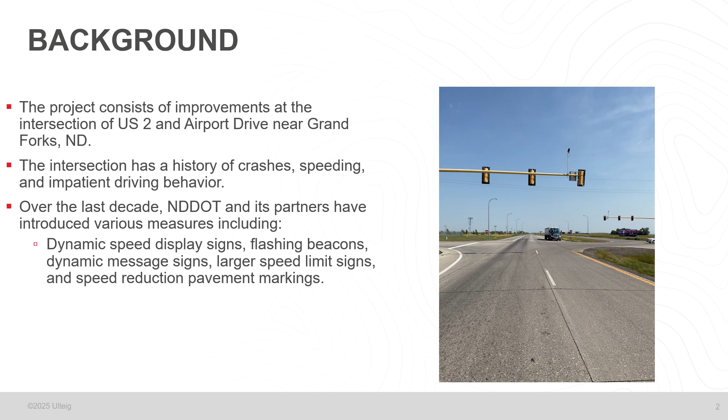This project is located at the intersection of US 2 and Airport Drive, which has experienced instances of impatient driver behavior, speeding, and a history of crashes. The North Dakota Department of Transportation and its partners have implemented several measures to slow drivers and improve awareness of the intersection. Things like dynamic speed display signs, flashing beacons, dynamic message signs, speed reduction pavement markings, and larger speed limit signs.

This intersection has been studied a number of times, and each effort has added valuable insight. Early work included the 2014 Local Road Safety Plan and the US Highway 2 Access Study. A road safety review followed in 2017, and more detailed traffic operations studies were completed in 2019 and 2024. These studies tell us what kind of improvements might help and how different designs could affect travel and reduce crash potential and severity. All that background gives the current project a strong foundation to build upon.

Now that we've talked about the information gathered from previous studies, let's look at the factors that define the range of alternatives at this intersection. Every project has its boundaries, and for this one, several key constraints help shape the range of alternatives we can consider. One of the most significant is the Grand Forks International Airport's runway protection zone, which extends towards the project area. These zones are regulated by the Federal Aviation Administration to ensure safe aircraft operations and limit the height or placement of certain infrastructure.

In addition, the area includes existing utilities, a water booster station that supports both the Grand Forks Airport and Grand Forks Air Force Base, access roads, business entrances, and the English Coulee watershed drainage ditch, all of which need to be considered during design and construction. Together, these factors establish the physical and operational boundaries for where intersection improvements could realistically fit within the surrounding area.

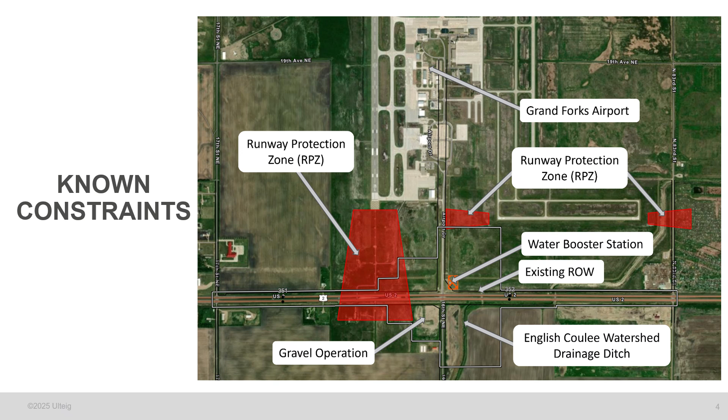Here you can see the project area. It's been drawn based on a combination of possible design alternatives and the known constraints in the area. The study area also accounts for known constraints such as the runway protection zones, utilities, nearby roads, property access, and environmental factors that could influence the design, such as wetlands, cultural sites, and species habitats. As the project moves forward, the information gathered from studies, fieldwork, and your comments will help narrow down which alternative best meets the project's needs.

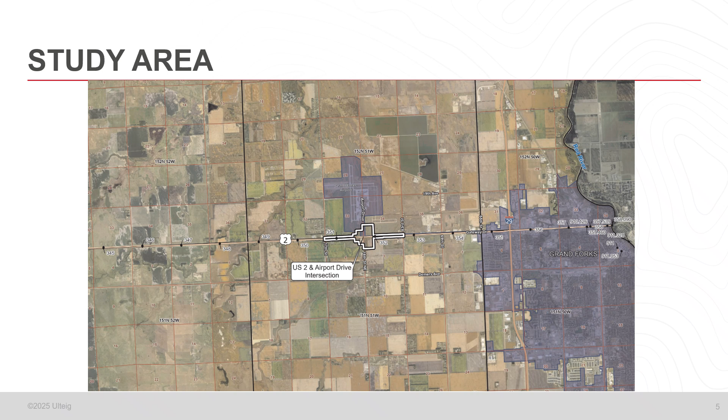Public feedback is a big part of this process, and one of the ways we've been gathering it is through Ulteig's Pinpoint app. Pinpoint is an interactive online map where users can drop pins and leave comments about specific locations. Some examples could include a spot where turning feels difficult, or traffic tends to back up, or visibility could be better. The project team has already used Pinpoint during our stakeholder meetings, collecting comments from local partners like the Airport Authority and city staff. Those insights helped us narrow down the initial range of design alternatives and focus on the options that best address the project needs.

Now we're opening Pinpoint to the public, so you can add your feedback too. Just scan the QR code on this slide or visit the link to share your thoughts directly on the map.

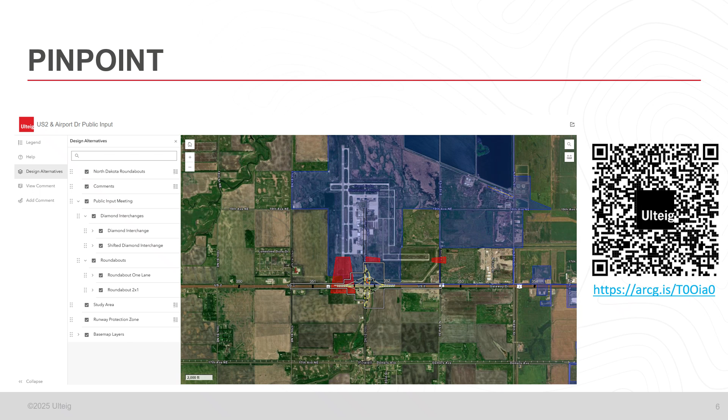Here's a quick look at where we are in the project schedule. Phase 1 scoping has been completed, covering the initial data collection and early coordination. We're now in Phase 2, which focuses on the environmental document, preliminary design, and continued stakeholder engagement. This phase will run through spring 2026, and it's where we'll evaluate design alternatives and identify a preferred solution. After that, Phase 3 will move into final design, right-of-way, and permitting once the preferred alternative and funding plan is confirmed. Public input is a valuable asset and will remain a key part of every decision as the project advances.

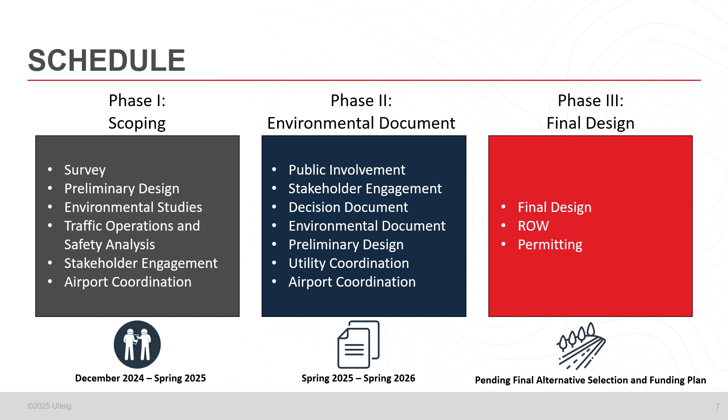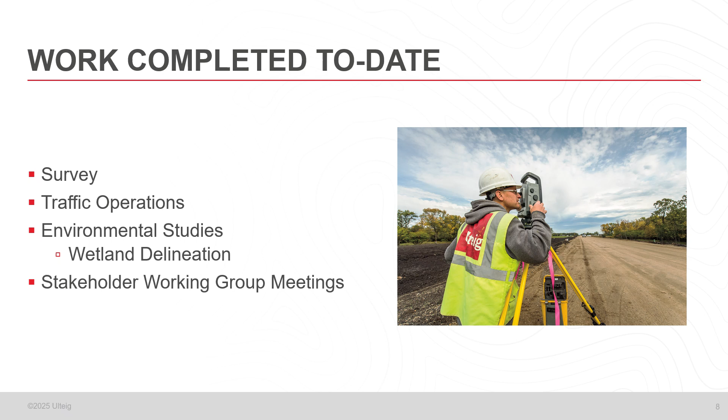Since kicking off the project, the team has made solid progress. We finished surveying work, collected traffic operations data, completed wetland delineations, and held stakeholder meetings, which we'll discuss in a moment. All this information feeds directly into the alternatives being developed and helps us understand the existing conditions, the constraints we'll need to work around, and the opportunities for improvement.

I'd like to send out a brief moment of gratitude and recognition to our stakeholder working group who has been heavily engaged in the project development throughout the last year. These entities include the North Dakota Department of Transportation, City of Grand Forks, Grand Forks County, Grand Forks East Grand Forks MPO, Grand Forks Airport, Grand Forks Air Force Base, Grand Forks Water Resource District, the North Dakota Highway Patrol, Grand Forks County Sheriff's Department, and the Federal Aviation Administration.

We came together for 3 separate stakeholder meetings to brainstorm the alternative development process. They've worked through these alternatives with the information we plan to present today to narrow down to what we believe to be the most feasible and acceptable options for the intersection of US 2 and Airport Drive. We will now take a deep dive into what the data shows on vehicular traffic at this location.

Early on, the project team took the strategy of utilizing advanced technology to create a data-driven, comprehensive study for evaluating the intersection of US 2 and Airport Drive. With this in mind, the project team went beyond traditional traffic counts for the study through the utilization of unmanned aerial systems to capture individual driver behavior as vehicles traverse the intersection.

Alongside that, we assembled a full stack of traditional sources from earlier studies: the Grand Forks East Grand Forks MPO travel demand model, recent population data to understand growth, the employer household dynamic dataset, survey inputs, and Urban SDK, which the MPO uses for visualizing travel time and speed insights.

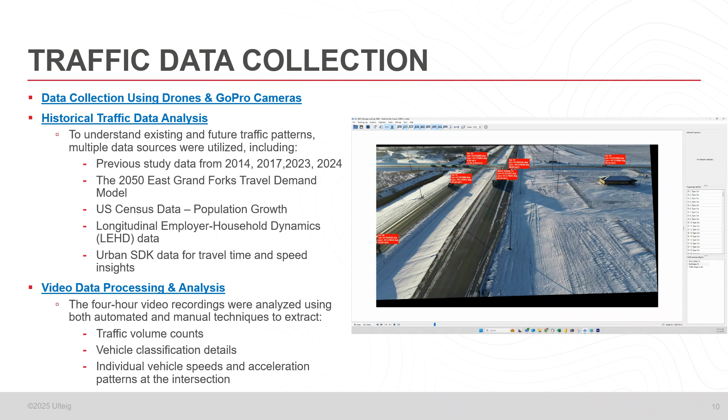With all that in hand, plus our previous counts, we processed 4 hours of video recorded at 30 frames per second. That level of detail let us extract vehicle classification, lane position, speed, and acceleration at every frame. Every second produced 30 data points per vehicle, which gave us a rich foundation for calibration and analysis.

To ensure our single count day was representative, we compared our AM peak hour 7 to 8 and PM peak hour 4 to 5 against prior studies and noticed our totals were consistently lower. To verify representativeness, we partnered with North Dakota State University and used their continuous counter near 55th Street. We pulled the full year for 2023 and 2024 and benchmarked our study data against the daily averages.

Video collected with the unmanned aerial system allowed us to identify and classify high-risk signal entries. We flagged any entry 2 or more seconds after the onset of yellow as high risk, and we binned them by time since yellow, 2 to 3 seconds and 3 to 4 seconds. These events often included drivers increasing speed as they approached the stop bar.

We also documented red light entries, including cases 4 to 5 seconds and 6 to 7 seconds after yellow began, plus one heavy vehicle that entered 2 to 3 seconds into red. The counts of high-risk entries were similar between AM and PM overall, but the dominant direction flipped, with more westbound entries in the morning and more eastbound entries in the afternoon. That mirrors the directional flow pattern: more people traveling west in the morning and east in the evening.

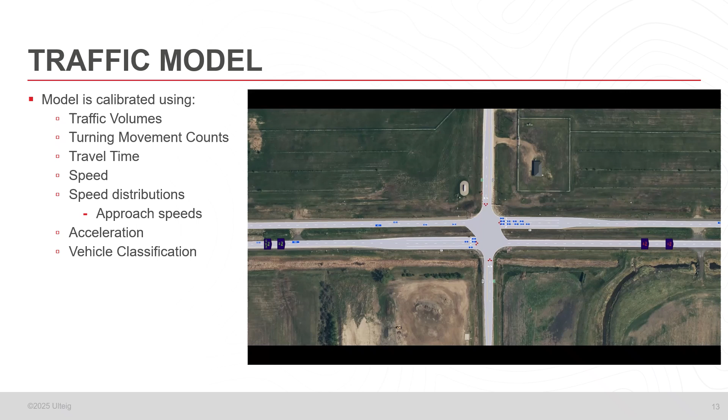As part of our study, we look closely at how well the intersection works, not just overall, but also for drivers coming from every direction. You'll notice that some alternatives experience levels of service D, E, or F on the minor streets for worst approach delays. The reason for minor street level of service D, E, or F values is straightforward. Heavy east-west demand starves the northbound and southbound approaches, which produces delays and visible queues. Standard timing tends to favor the main line to keep the corridor moving, but that places a disproportionate burden on the side streets.

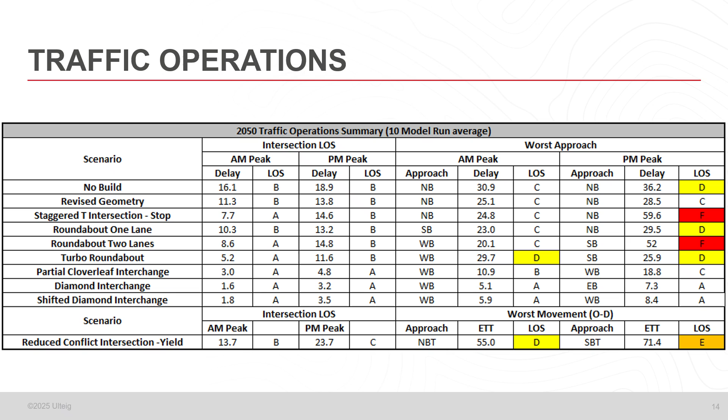It's important to know that even when the side streets get a low grade, it doesn't always mean there are huge backups. Because there aren't as many cars on those roads, just 1 or 2 drivers waiting a minute or so can make the average wait time look worse than it feels in real life. Our models show that when a gap opens up on the main highway, the lines on the side streets clear out quickly.

After analyzing the traffic data and assessing the physical constraints of the site, through close collaboration with the stakeholder working group, we have narrowed the project down to two main overarching design approaches, these being either an interchange or a roundabout. Today, we are going to focus on the three alternatives based in these design approaches that have received the most positive responses from the various stakeholders on this project.

The first are for the roundabout, with either a single lane or 2x1 roundabout. We'll look at what this means and the difference between the two in a moment. Then for the interchange, we'll be looking at a shifted diamond interchange, which is just a slight variation on a normal diamond interchange. Now, let's take a look at some of the advantages and disadvantages of a roundabout in general.

For advantages, we see reduced crash potential, and when crashes do occur, the severity is generally reduced significantly. A roundabout will be able to handle larger traffic volumes than the existing intersection as well as provide more consistent speeds by reducing stops and idle times. It is also a relatively cost-effective improvement to the intersection.

As for disadvantages, building a roundabout also requires relatively complex phasing. We will likely see short-term impacts to traffic throughout construction. Next is that while stops will be reduced, traffic will still need to slow down and potentially yield before entering.

On specifically the 2x1 alternative, larger trucks may encroach on adjacent lanes while navigating the roundabout. And finally, we will note that the multi-lane roundabouts have a greater crash potential than single-lane roundabouts. However, I would like to reiterate that crash severity is still reduced with both roundabout options.

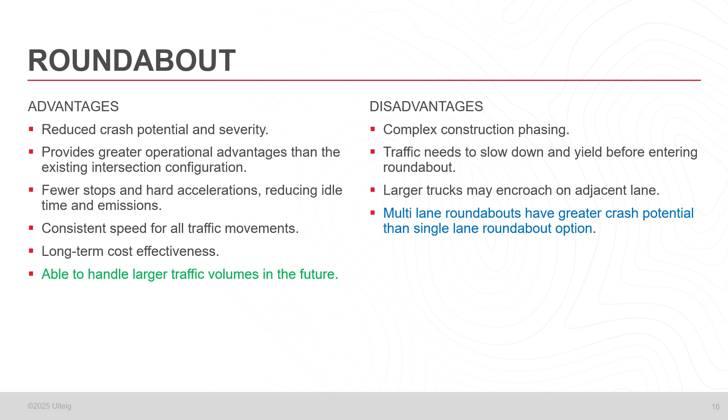Several national roundabout studies support data showing that intersections converted to roundabouts reduce crashes. Roundabouts provide a significant reduction in injury crashes due to the reduction of conflict points, lower operating speeds, mitigation of high-speed right angle or T-bone and rear-end collisions, and an overall decrease in all types of accidents. Fatal crashes are extremely rare at roundabouts.

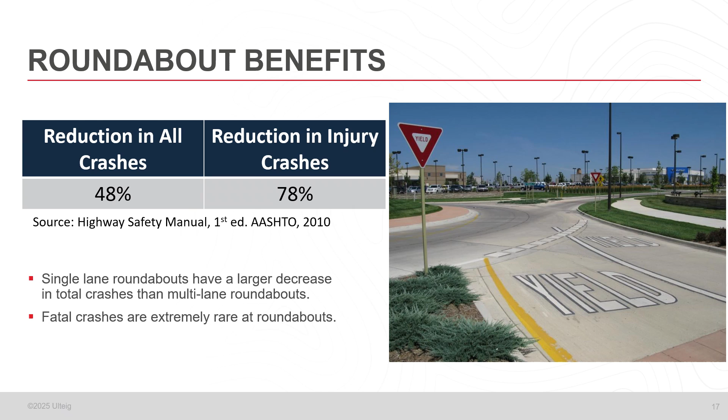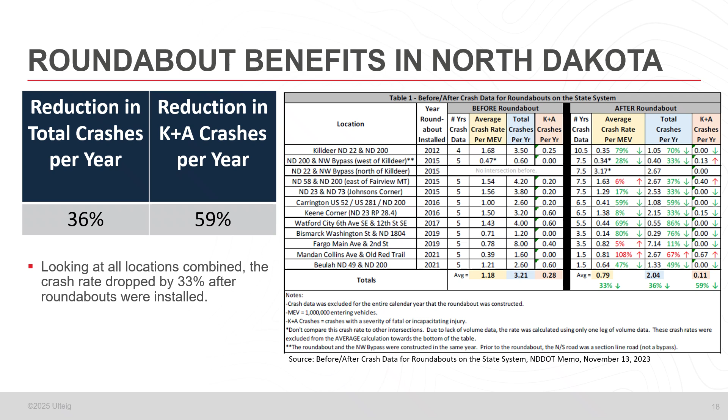Single-lane roundabouts tend to perform best due to the simple configuration, least amount of conflict points, and the lack of lane changes. A recent North Dakota Department of Transportation analysis compared crash data before and after roundabouts were installed on the state system. According to the study, overall crash rates decreased by 33%. Total crashes per year dropped by 36%, and fatal plus incapacitating injury crashes fell 59% statewide after installation.

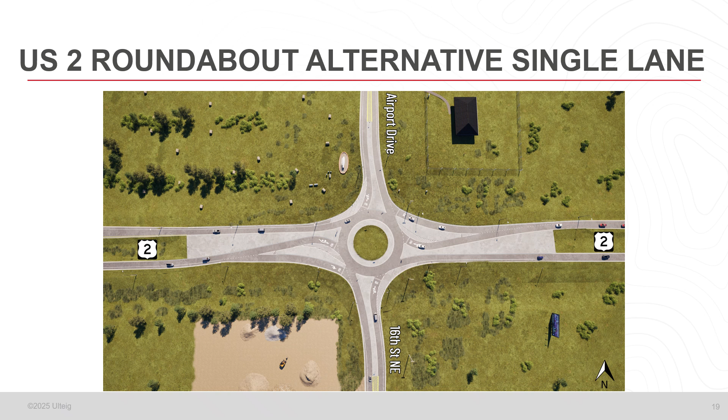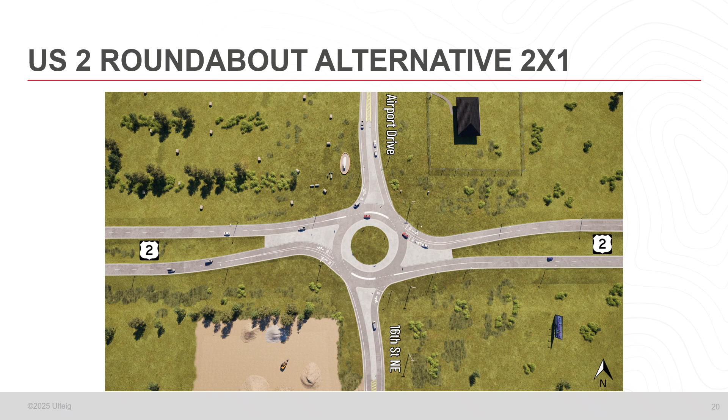A roundabout study completed by North Dakota Department of Transportation in 2023 shows this intersection has experienced a 33% reduction in total crashes since installation. It's a strong example of how a properly designed roundabout can safely and efficiently handle heavy truck traffic and regional traffic alike.

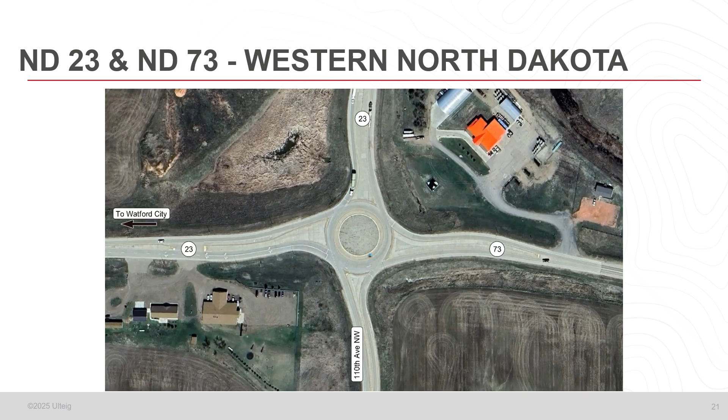This is the intersection of US 52, US 281, and ND 200 in Carrington, North Dakota. While Carrington is more urban than the US 2 and Airport Drive location, it carries heavy truck traffic tied to agriculture and regional freight. With US 52, US 281, and ND 200 converging at this point, the roundabout was built to manage those high volumes safely and efficiently and has performed well, improving traffic flow and reducing the number and severity of crashes, even with frequent large vehicle movements through the intersection.

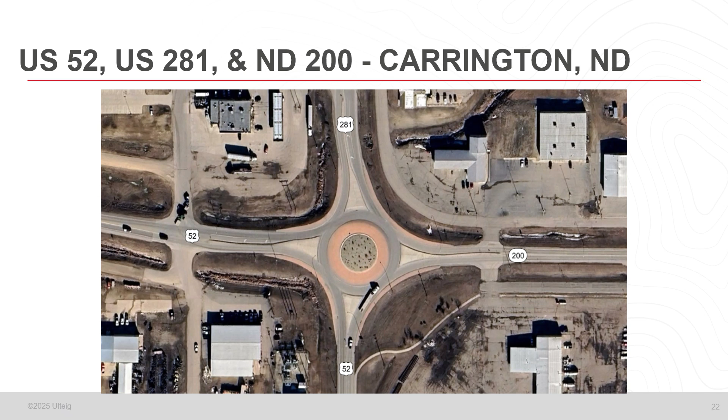The roundabout study previously discussed shows this intersection has experienced a 59% reduction in crash rate since installation. Located relatively close to Grand Forks and serving similar traffic types, it demonstrates how a modern roundabout can function effectively in a busy, mixed traffic setting like that proposed at US 2 and Airport Drive.

This is the intersection of Main Avenue and 2nd Street South in Fargo, North Dakota. This location represents a 2x1 lane configuration and was built to manage heavy traffic volumes safely and efficiently. The roundabout study previously discussed shows this intersection has experienced an 11% reduction in crash rate since installation.

Located relatively close to Grand Forks and serving similar traffic types, it is an example of how a 2x1 roundabout can function effectively in a busy, mixed traffic setting like that proposed at US 2 and Airport Drive.

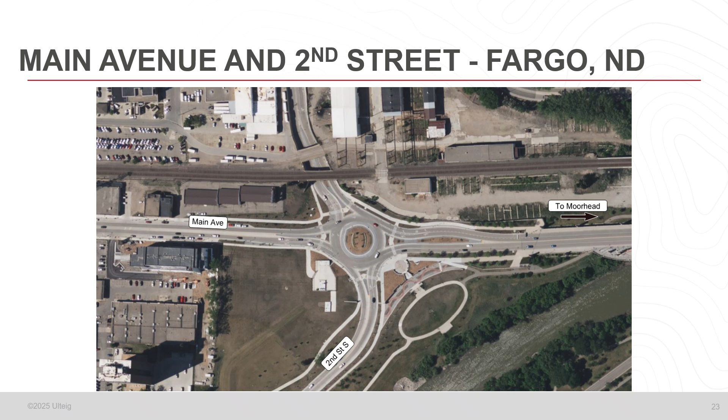For more information on roundabouts, the North Dakota Department of Transportation has an informational site available that you can access by scanning the QR code, going to the link shown, or searching North Dakota DOT roundabouts online. Here you'll be able to find a variety of information including how to navigate a roundabout, the differences from a signalized intersection, and studies of roundabouts throughout North Dakota.

Next, let's look at the advantages and disadvantages of interchanges. Interchange alternatives feature reduced numbers of conflict points, which reduces the crash potential and severity at this location. They also provide improved traffic operations by allowing continuous traffic flow on both US 2 and Airport Drive, resulting in reduced travel times over existing conditions.

As for disadvantages, an interchange would have a high cost along with a longer construction outlook. It would have significant impacts to surrounding properties, requiring significant land acquisition. Most interchange variations would encroach on the airport's runway protection zone, and some have the potential to impact the airport's airspace. We'd also likely see impacts to the water booster station in the northeast corner, which would need to be relocated, impacts to overhead utilities, and impacts to the English Coulee watershed drainage ditch to the southeast.

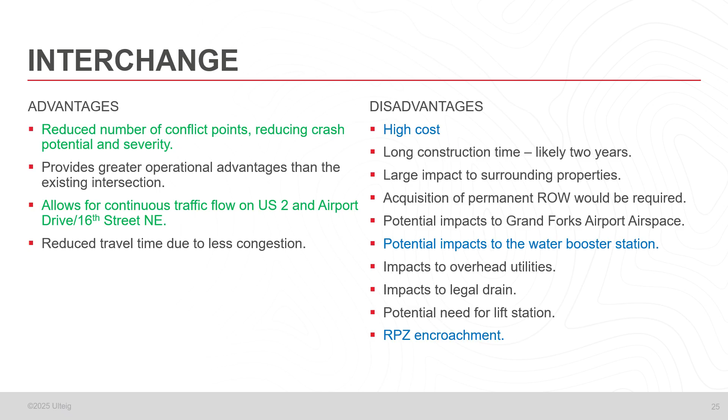Here we have a rendering of what an interchange at this location might look like. One thing to point out here is that this alternative shown would shift Airport Drive and 16th Street about 300 feet to the east to reduce impacts to the airport's runway protection zone and airspace.

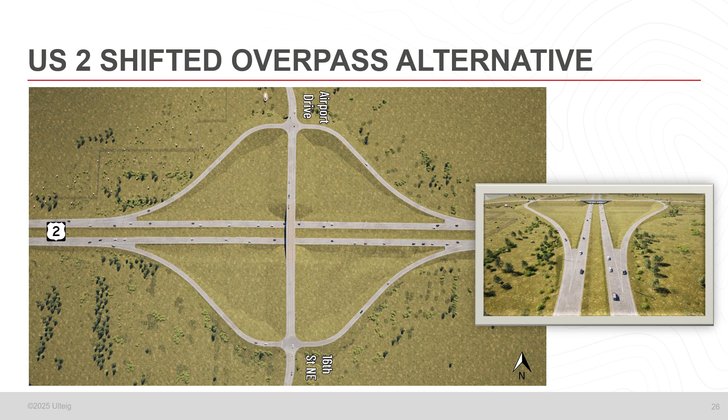Across concepts, none of these are capacity constrained in 2050. Intersection delay tells the same story. The single lane and 2x1 roundabouts land in the B range in the PM, while the shifted diamond is A. The differences show up in worst approach delay and queue metrics. The single lane roundabout shows a higher max queue on the westbound approach, but the 95th percentile queue is much shorter, which means those long spikes are rare and clear quickly.

The 2x1 can show a longer westbound 95th percentile queue than the single lane, even though the extra lane often helps, and its worst approach delay can read like an F on paper when a few low-volume, gap-seeking vehicles wait 60 seconds to enter. That's a small sample artifact more than a persistent queue problem. In practical terms, typical queues are a handful of vehicles and dissipate. You may wait a bit to find a gap, but you're not seeing sustained lines of vehicles.

Operationally, all three are acceptable at the corridor level, so the decision leans more on safety performance, environmental impacts, construction costs, construction timeline, and context, rather than raw capacity.

Next, let's look at the expected right-of-way impacts. This is land that would need to be purchased either temporarily or permanently for the construction of each alternative. We currently don't expect any right-of-way purchases to be needed to build the roundabout alternatives, as the roundabout could be constructed almost entirely within the existing roadway footprint. The interchange alternative would require approximately 29 acres of permanent acquisition, as well as 10 acres of temporary acquisition to accommodate construction activities.

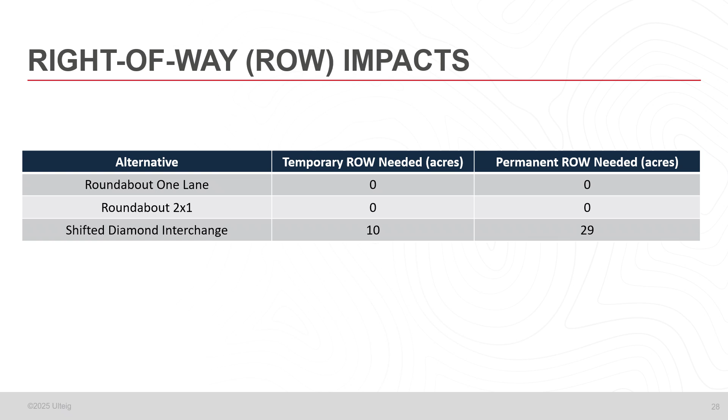Here we have the estimated cost to build each alternative. The left column is the estimated cost in today's dollars, and the right column is estimated cost at the time of construction. Due to the lower costs, reduced impacts, and less intensive design and planning process required, the roundabouts could feasibly be built in 4 years. We are currently estimating costs of $8.5 million for the single lane roundabout and $12 million for the 2x1 roundabout.

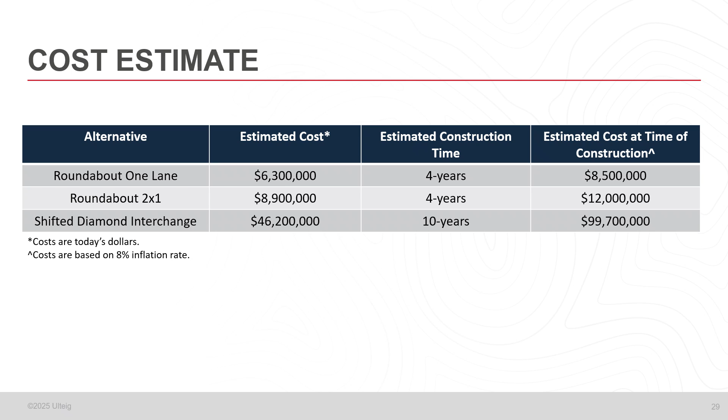The high costs, greater impacts, and considerably more in-depth engineering and planning required of an interchange means that a realistic timeframe for construction could be up to 10 years or greater. With inflation, we are estimating a total cost of $99.7 million to construct an interchange.